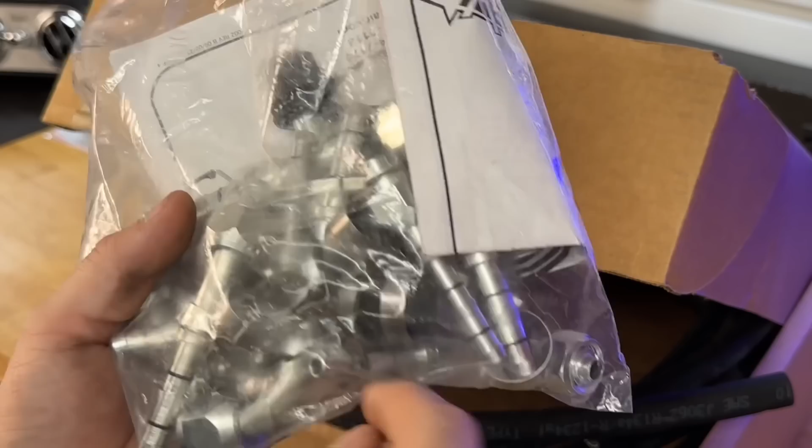The last thing that I purchased was this Easy Clip universal kit from Vintage Air. It has two 20-foot pieces of air conditioner line. With this Easy Clips kit, it comes with all these different connectors, straight fittings, 45s, 90s, but it has these Easy Clips on there that you can see right here, and you buy a specialty tool that will clamp those clips onto the line. It doesn't require you to get one of those big air conditioner clamps that are like $300 to clamp these lines on.

You can do it all from home, and it makes it very easy for me, especially because I want to go ahead and do everything that I can from here and not have to measure the line and take it out to a shop to have them cut it and crimp it. I like to be able to just do it all from home if possible. We'll see, this is the first time I've used this kit, but it was about $400 for the line, the clamps, everything.

Here are the Easy Clip pliers. When I bought this kit, I didn't realize you had to have a specific plier to use them, but it has a design that helps really clip these in tight. These are about 80 bucks for these pliers, so get ready to spend it up, but this is something I plan, if this works out, to use for all my AC, because I'll be installing AC on Lucky next, and I want to use the clip kit the same way. Good to have.

All right, first I'm going to take everything out of this box, unbox it, and lay it on the table over here, get out the instructions, and start to assemble everything just to get an idea of how it's going to install. Those instructions will tell me how to hook up everything on the front of the truck. I'll have to unbolt the radiator, and I might have to unbolt the fan, just to get everything out of the way for the condenser to get in there. But we'll see, we'll follow the directions.

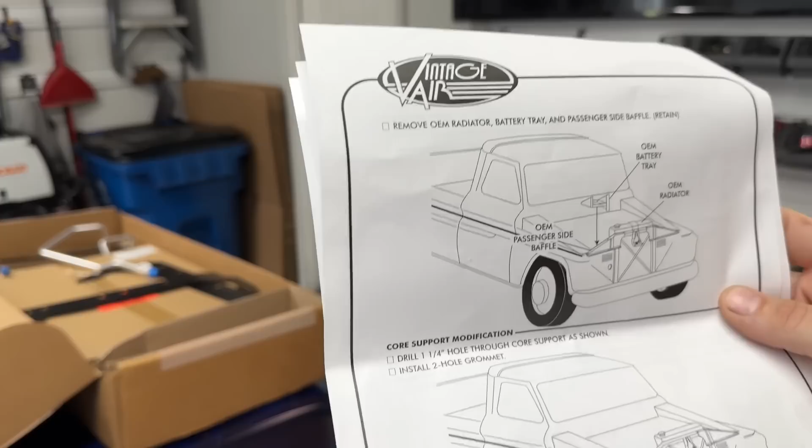All right, it says to take out the OEM battery tray. Well, I ain't got that anymore, so that's gone. And the OEM radiator, we're going to take that out and drill the hole.

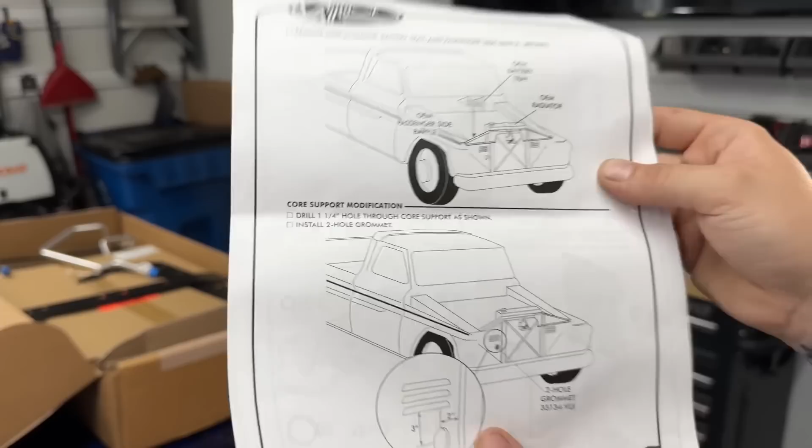You're going to measure across 2 inches and then down 3 inches from these vents, drill out a 1.25 inch hole, and then put the grommet there, and that's where the lines are going to run through the radiator support.

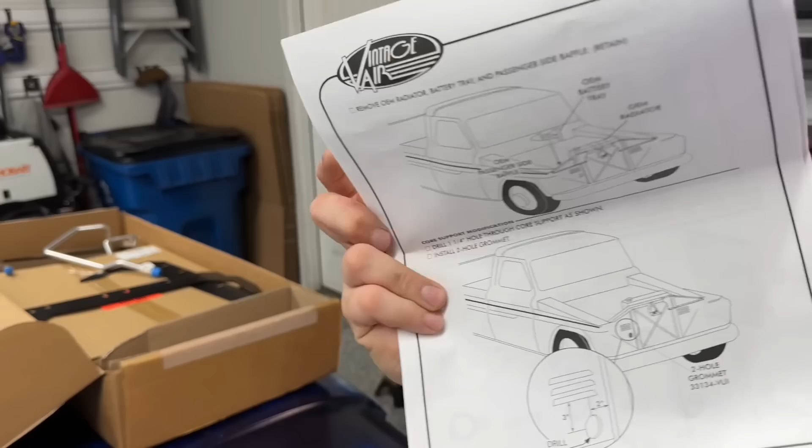Before we drill the hole and stuff, we're going to go ahead and assemble this part. So we're going to take out those 2 brackets and mount those on there just the way the instructions called for. I'm not going to go through every single step. If you buy the kit, you're going to have the instructions, but you're going to use the bolts and washers and all the things they use to bolt that all together. Follow the instructions here.

And then we will go ahead and mount up the dryer, just pay attention to the flow of the dryer, and you'll mount that there with the hardware, and then we will put the lines in there.

We're going to take everything out except the hardware. I'm going to go in here and get these little O-rings. I'm going to make sure we don't lose the O-rings or damage those in any way. We'll need those for sure. Go ahead and put those in the bag.

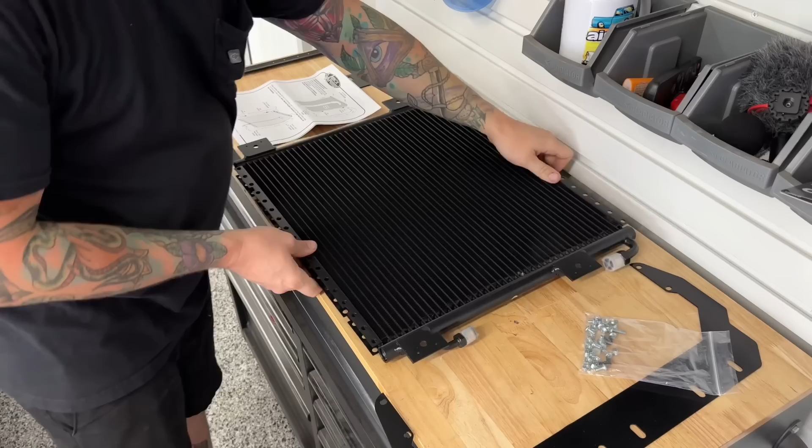On the picture, you can kind of see these brackets that are on the back side with these on the right side here. So it's actually going to mount up to the radiator the opposite, but we're installing these brackets this way so that will push this part further in behind the radiator.

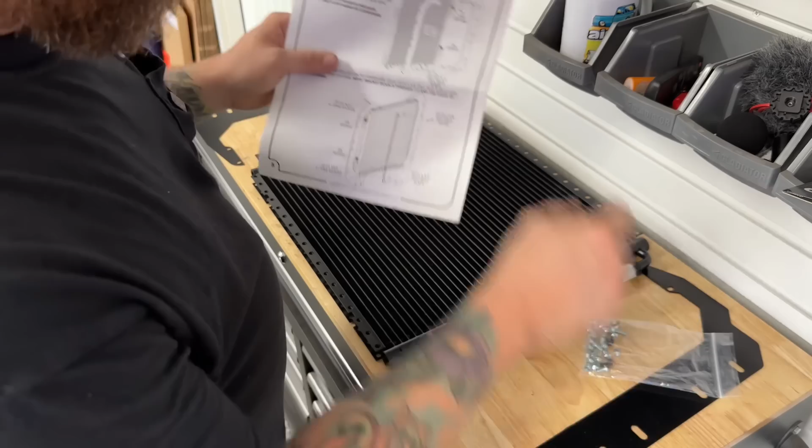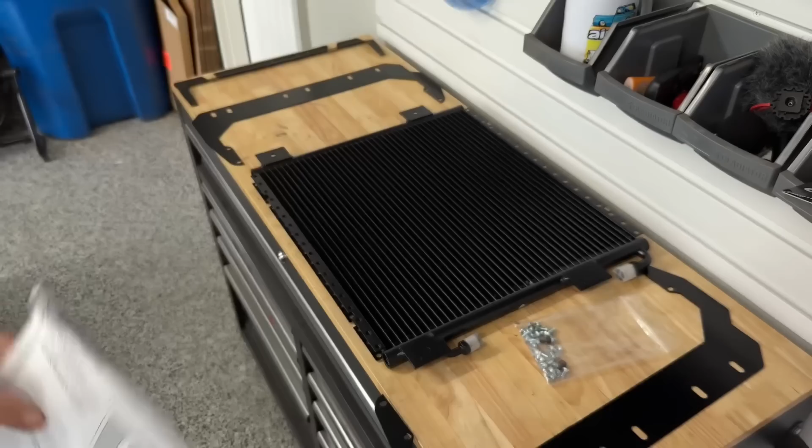There's the brackets on the side. Here's the brackets. Something I paid attention to whenever I was looking at it, I saw that the two holes that were closer together were on the bottom. As you see right there, those are on the bottom on both sides. So I know I've got that oriented correctly.

Be careful with that. I have seen on some installation videos people get that backwards. So what I want to do is just go ahead and get everything finger tight, and I'm going to come back with a ratchet and a screwdriver and tighten everything up.

So these basically just kind of mount together here, and on the instructions it shows that they're going in... ooh, that's hard to tell. It looks like they skip a hole and then go into the second and third hole. Yep, so skip your first hole and they go into the second and third hole here.

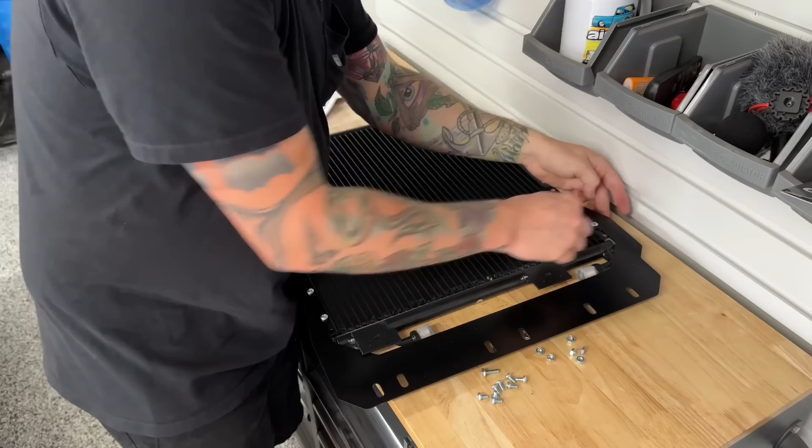I'm excited to get air conditioning on this thing because the Battle of Bama wasn't bad. It was actually very cool in the mornings when Brian and I drove down there. But golly, this past 2 weeks it has been scorching hot, and I'm really not looking forward to driving to Atlanta with it being so hot.

I saw the videos of Robbie from United by Trucks sweating in his truck, so I know it's hot down there. About 3 hours away from Atlanta, pretty much interstate the whole way, go through Chattanooga and then head down there, so not too bad of a trip.

It will be 2 long trips in a row for Francis though, so it'll be another test. Francis did great on the way to Talladega. I was really surprised. That was the first time I'd really drove it that far, and I was just nervous the whole way.

You know, when you get into a newer build, I only had a couple hundred miles on that truck, just driving it around the house on back roads to church, just 20-30 minute road trips. There was one day I drove it around about 3 hours to test it on the back roads, but nothing like a 3 or 4 hour straight trip somewhere. So I was really happy with how good it did on that trip.

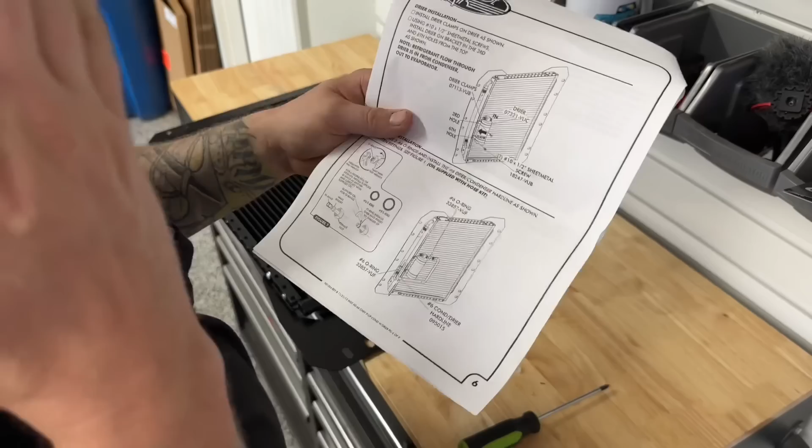But we've got those brackets installed the way that we needed them. Install the dryer clamps on the dryer using the sheet metal screws - that is these right here. We're going to get the 2 little clamps out to clamp that, and after that we will start installing the little O-rings and all that stuff.

Let's get the clamps, I'm going to go on like this right here, top and the bottom. Just like that right there.

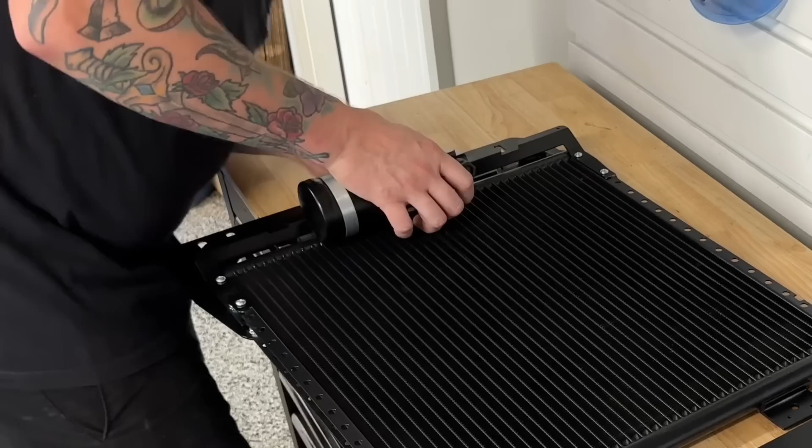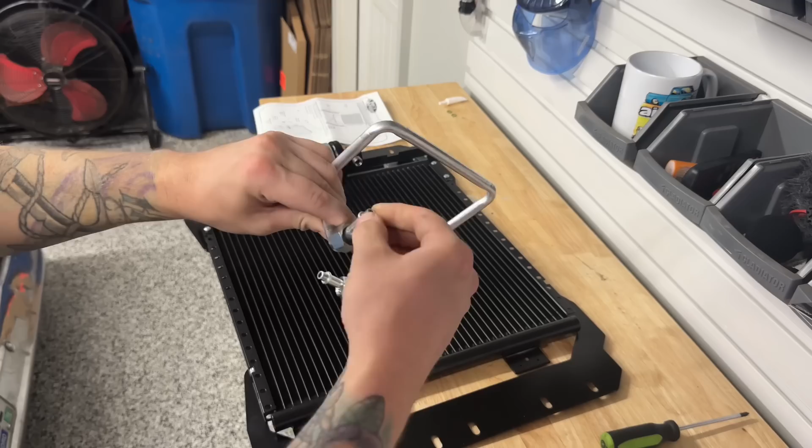All right, now it's time to put this little piece on right here. We've got to put 2 number 6 O-rings, which are the smaller O-rings. We've got to put a little bit of lubrication on there and then tighten them down. I'm going to go ahead and get them finger tight, and then I'll get the tools that I need.

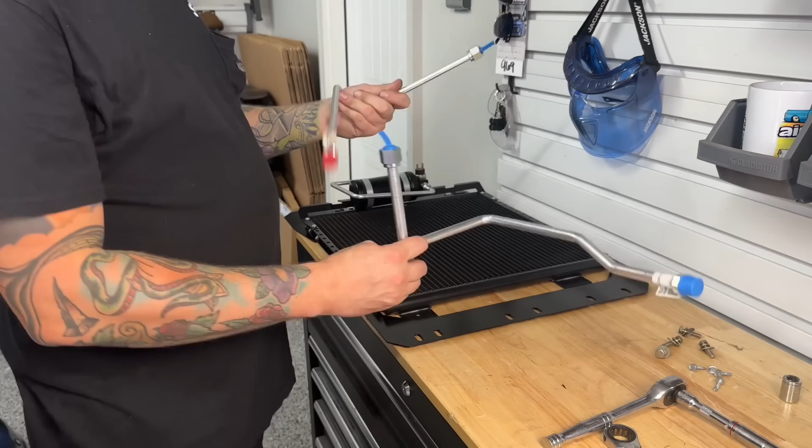Got that on there, all right, we've got this ready. I went ahead and unbolted the radiator and the fan and all that stuff. But what I realized is this front piece usually comes with the Sure Fit kit, and it comes with these pre-bent pieces that usually mount. You drill a hole in the radiator support there, these kind of stick through, and then the lines connect to these along your factory inner fender.

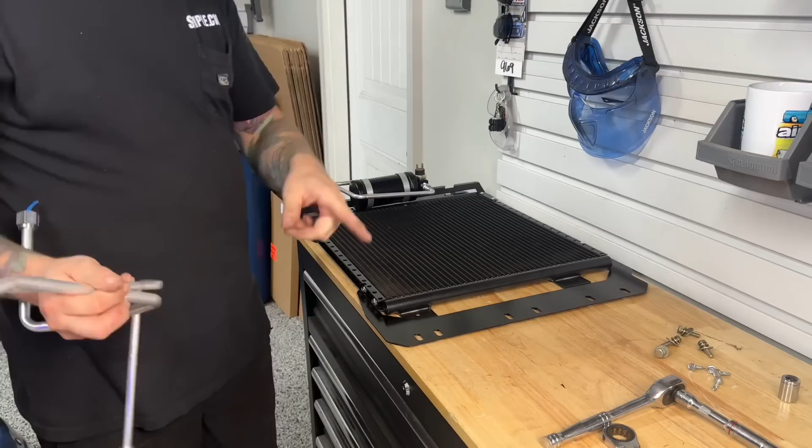Well, these would work under the GMSS inner fender, but you've got this big piece kind of sticking out, and it isn't going to give me the clean look that I'm going for on this truck. So I'm going to use that Easy Clip universal kit, and I already put some of the fittings on here to see what way I could run the lines. But I'm just going to run the lines and drill a hole closer to the frame down here, and then 45 off of these through the hole with a grommet on it and along the frame rail.

So basically, I'm not going to use these. I'm going to use my universal Easy Clip kit to mount those onto these 2 fittings and run the line where I need it to run without using these. I'll walk you through that. I've got to get this piece bolted into place and then fool around with the fittings and see what's the best way that I can run these lines up to the firewall.

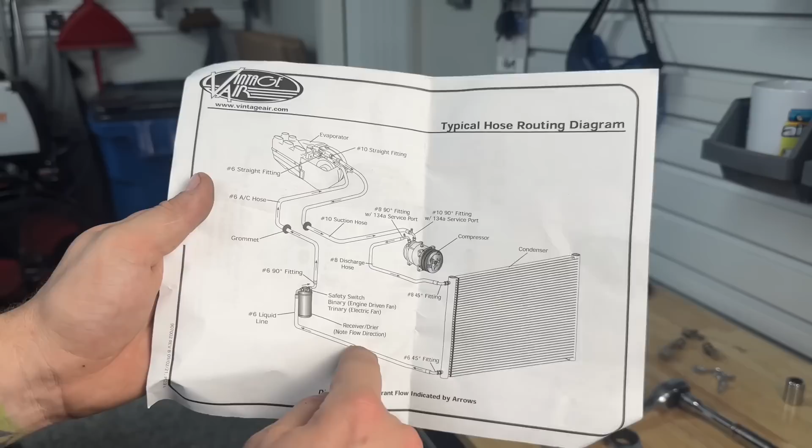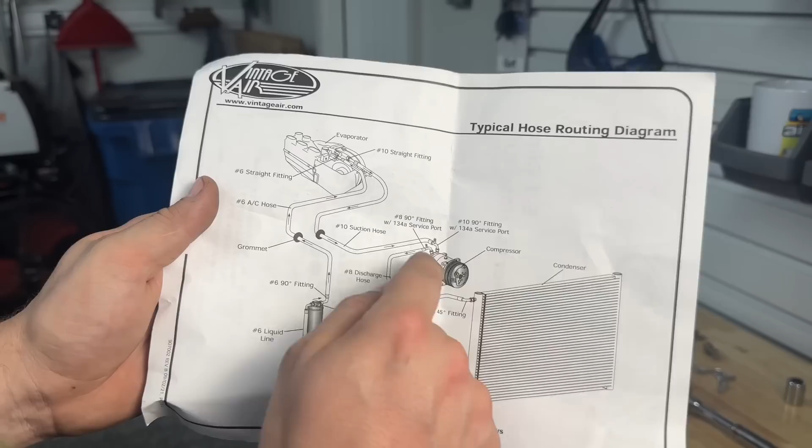On the Vintage Air kit, it gives you a typical hose routing diagram. We already have the condenser and dryer mounted, and this line is a hard line I just installed. So what we need to do is use the universal kit to find a fitting that fits up here and leads all the way to the compressor, then use a fitting here to run to the heritage unit, and from here use a fitting and run it all the way to the heritage unit.

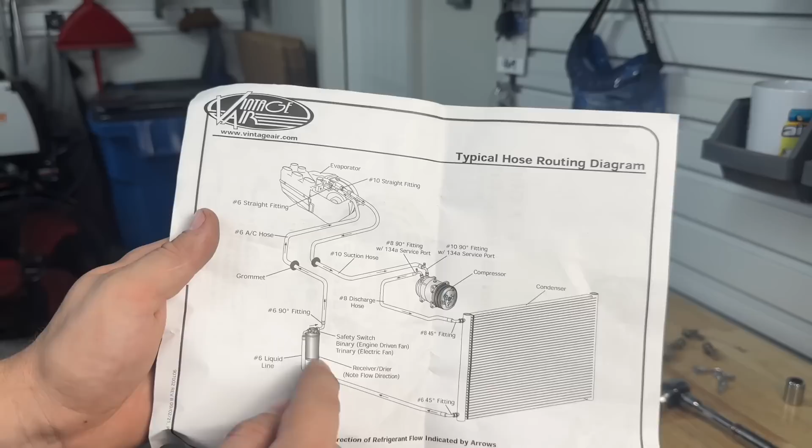Instead of drilling a hole in the firewall and running hard lines through it, we're just going to attach a couple fittings to the condenser and run our hose through the radiator support along the frame into the compressor, and then all the way up to the firewall into the heritage unit.

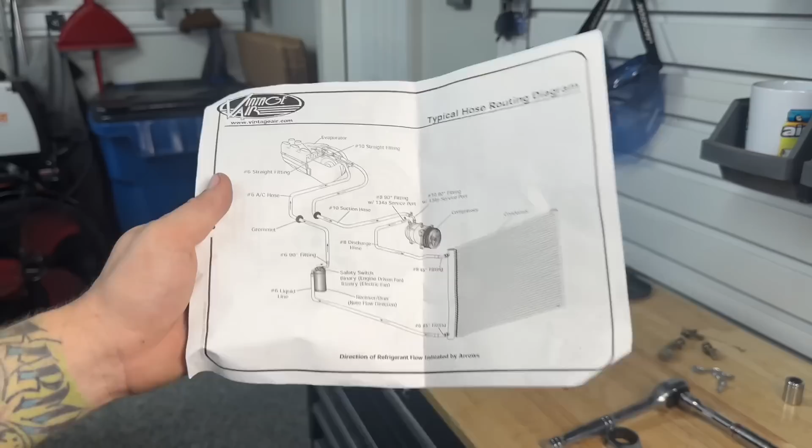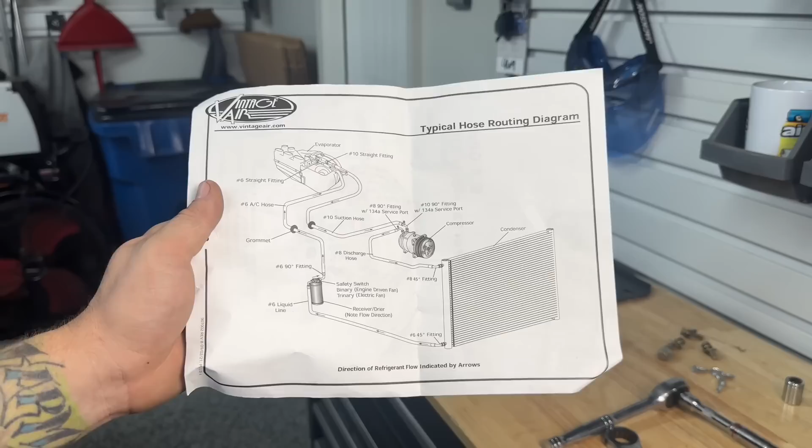I know that was a lot of words, but talking through this in my mind, I know I have enough fittings and everything. I might not have enough fittings to do exactly how I wanted on the firewall with the bulkhead fitting, but I can just drill two holes and put grommets and run the lines through there up under the fender or something. We'll figure that out.

Let's go ahead and mount the condenser in there and see what we're working with. I mentioned earlier I unbolted the radiator, and I just needed enough clearance to angle it up like this to slide down the condenser here. I'm going to take off this top piece because that's where I'm going to access all the fittings, and I'll just hand tighten them on there, then figure out where I can run my lines and drill a hole further down under the tub here.

We're just going to slide it right in between here.

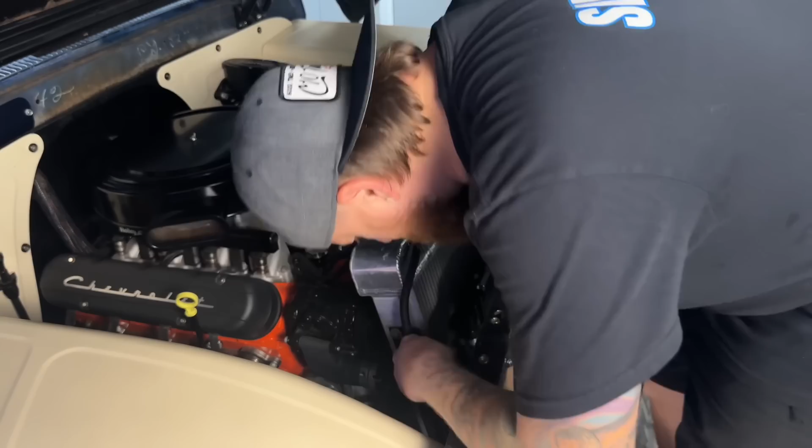You see the two fittings. Usually those metal pieces would loop around and then go through the firewall there. But what I'm going to do is put 45s on each one and run both of those lines in front of this piece, then drill a hole as far down here as I can, level with the frame, and run those lines along the frame and up to here, all the way to the firewall, and find a place to drill and insert those two hoses.

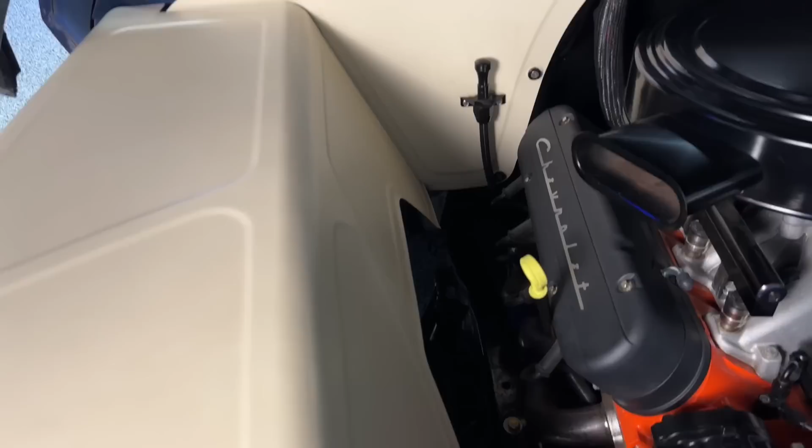Next up, we have the bracket that goes to your compressor.

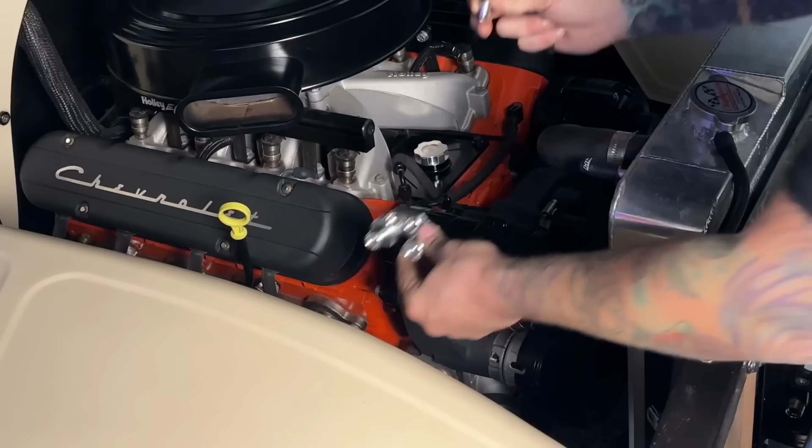If you're not running the Holley mid-mount setup, you might not have this bracket, but we're going to install the gaskets first and then put the bracket on and bolt it down. This bracket has the 90-degree fittings with the plugs to charge the system. So we'll install those, then run the lines up to it, cut those to size, clamp our lines in here, and run them inside the cab.

I'm just going to install these hand tight for right now. That way I can get the angle I need whenever I'm running the lines, and we'll tighten them down at the very last once I get all the lines in.

On the front section right here, I'm just going to test fit a couple of the different angles. I have a 45 and a 90 that I can use, but I want to screw those in there to see about the angle of the lines because they're kind of thick.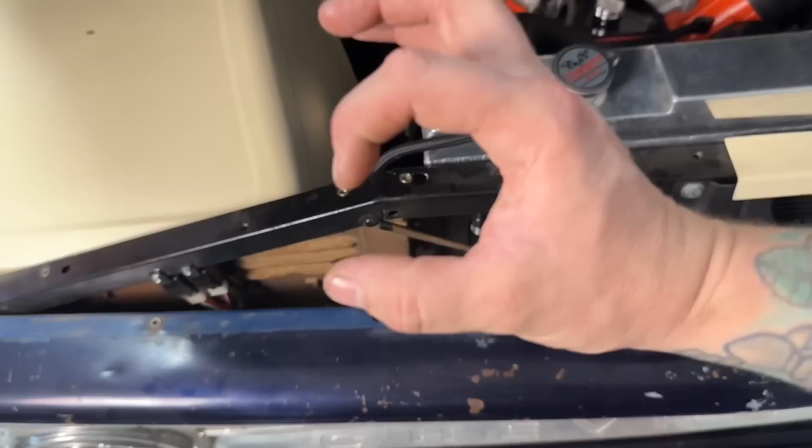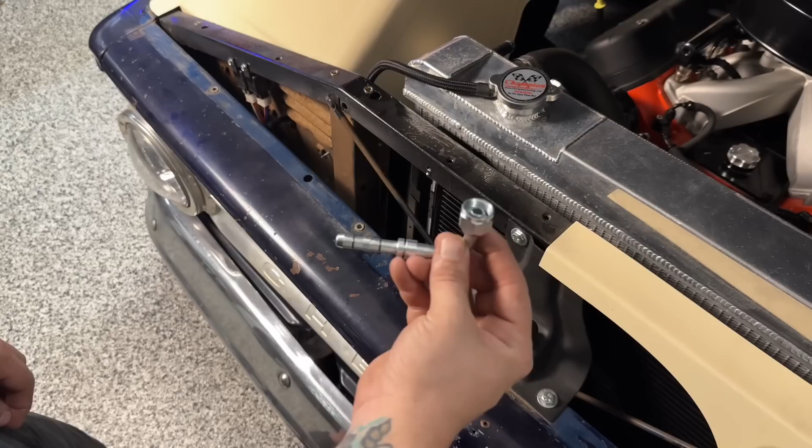I've got a grommet that I'm going to use after I install the lines, and I'll run the lines through the grommet and along the frame. It looks like this 90-degree fitting is going to work best down bottom, and then I'll run a 45 up top to be able to run the line down toward the bottom on the frame.

I'm just going to get the line into this fitting and use the easy clips to clip it in. That way I can start running the lines up to the cab and drill the holes through the cab and connect everything to the compressor. So whenever you get ready to install this, there are 3 different size lines.

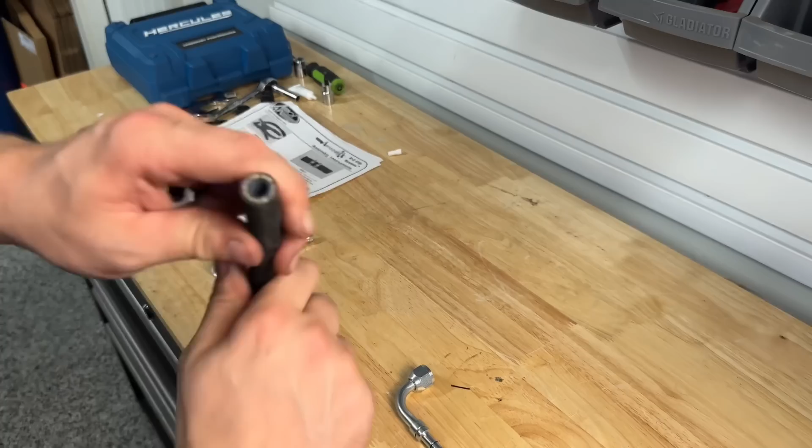They're pretty easily distinguishable. This is the smallest line, here's the medium size line, and then there's one bigger size that goes directly inside of the cab.

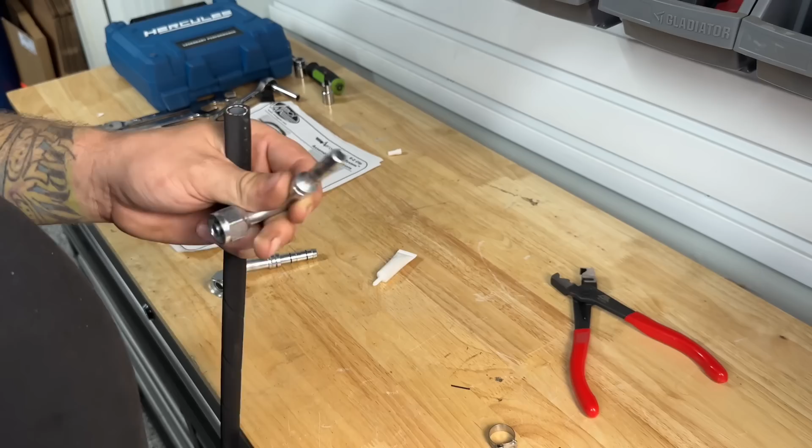But first, we're going to grab these pliers here, the easy clip pliers. We're going to grab the connections that slide onto the actual line to clip it on, and then there's something called a cage that slides on and connects. But first we want to lube up the connection a little bit so it slides into the line pretty easy.

We're going to take our clips and slide those on first because they won't fit over the end of the fitting. Slide this in, and then we'll put the collar or the cage—I've heard it called a couple different things. We're going to slide that on the end.

What I like about this is there's a specific groove that it slides into to make sure you get it in the right placement right here. You'll see me slide it on—slides on right there in the groove. And then the clips slide over those, and there's grooves in it that puts it at the exact placement you need. That puts it right on the little rubber grommets or the seals on the connection itself.

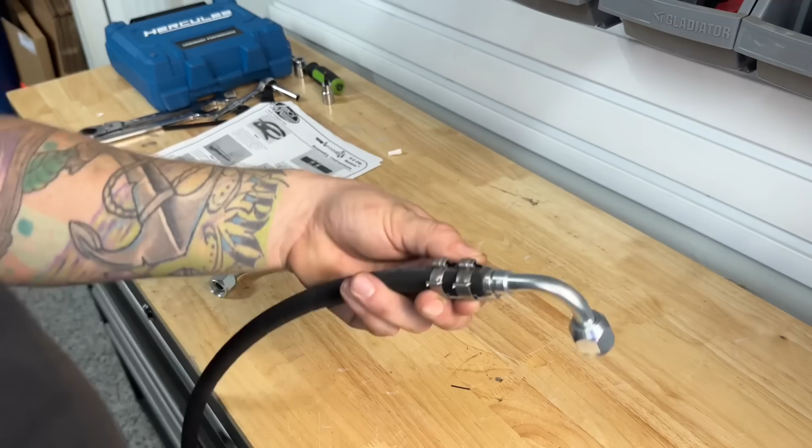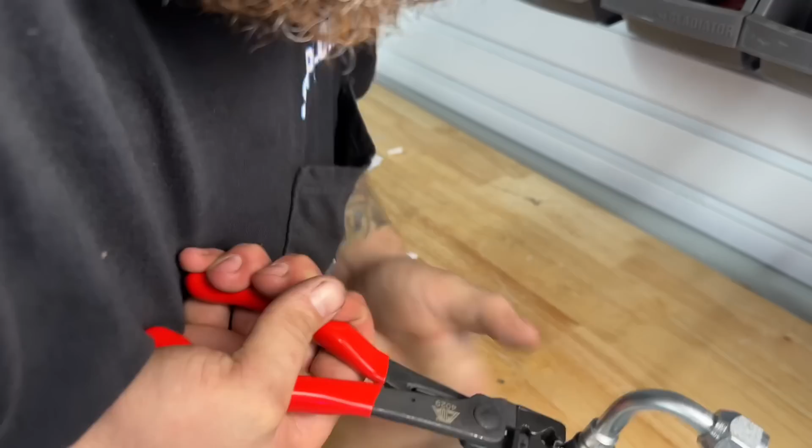So we'll grab that. You just take your pliers, and there's a specific way that the pliers work. You use the long end of the plier to go onto the edge to push it up into the clip. If you look at it, you can kind of see. But from there, you just squeeze it, clip it in, and you'll hear it snap, and you know you have it in the right place. Boom, there it is. Nice.

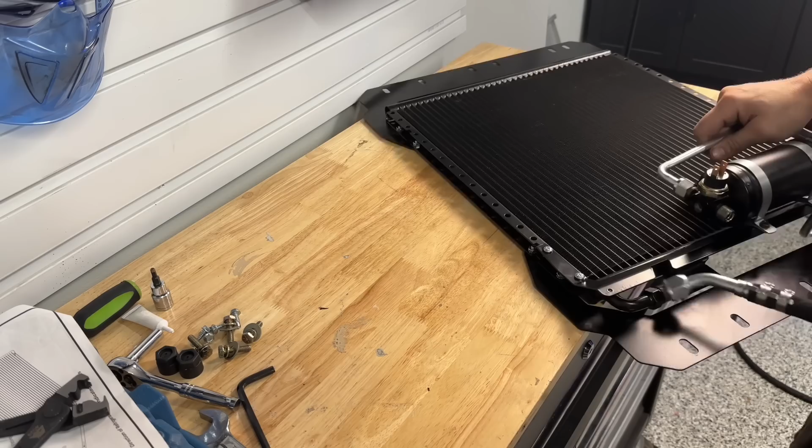Alright, you'll see that I went ahead and pulled out the condenser again and the dryer, and that is because it's really hard to clamp down these connections from inside of the truck. It is possible, but I just went ahead—I didn't have it bolted in all the way yet, so I just pulled it out.

And I'm going to bolt it in here. As you saw, I pointed at the dryer. I'm going to use the 45 up top, and that's the one I'm screwing in now. Then I'm going to use the 90 for the dryer right there on the bottom. I'm going to run those lines through the grommet that I'm going to drill here in just a second. Just tighten these down hand tight—you don't want to tighten them up too much.

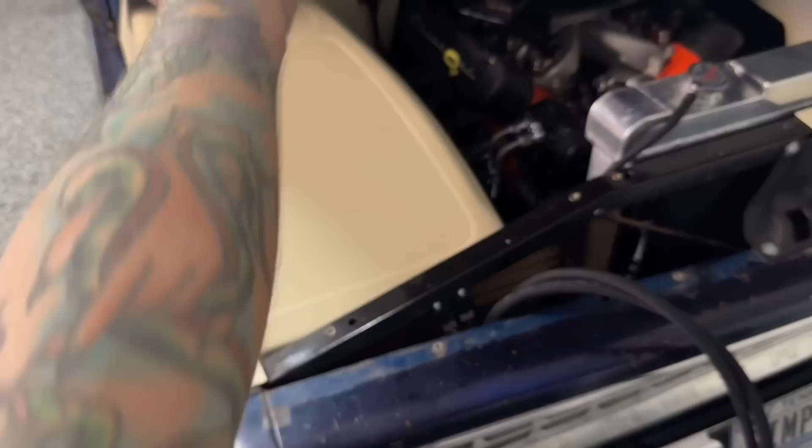Now that I have the condenser back in, the radiator's bolted in, and the lines are ready to go, I'm just going to go down and drill a hole very similar to where the instructions say. I have a 1.25 inch hole here with a grommet the right size. I'm going to go from inside the wheel well and drill it very close to the frame and then run the lines through there.

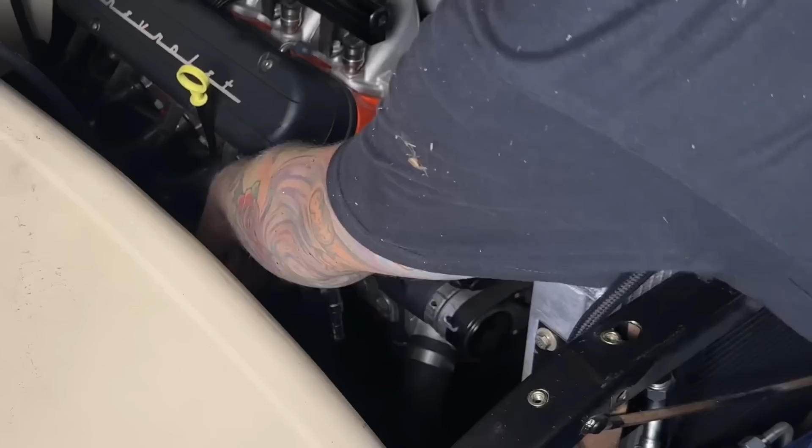Now this was tricky—this was the trickiest part—getting all the lines through the grommet, because they wanted to kink up, and I had to work them with my hand. You'll see in a minute I scratched up my hand pretty bad trying to get the lines through there. So just take your time with it.

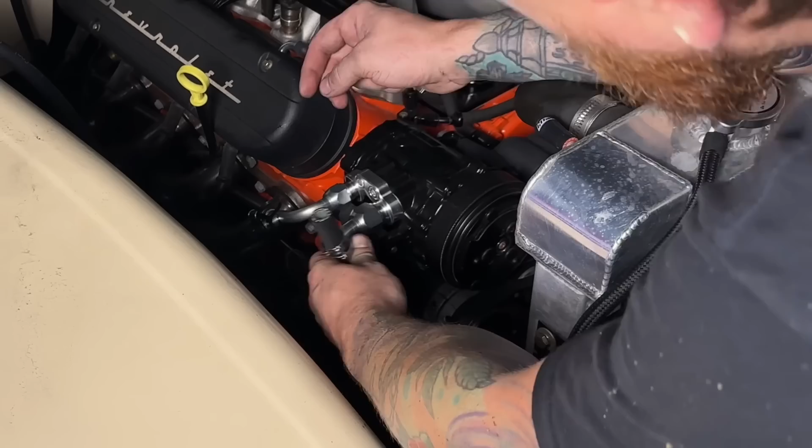Once you get the lines ran through, I'm going to run them up to the compressor and then cut them to size and go ahead and clip them in on here. That way I have all the front lines ran all the way from the condenser to the compressor, and now I'm focused on the lines running from the compressor all the way inside the cab, and then I'll cut those to length inside the cab once we have the Heritage unit done.

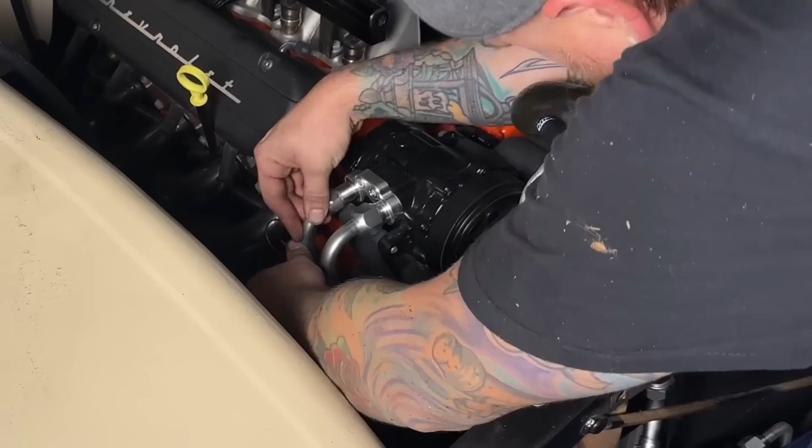Now it's time to install the biggest line on the compressor. This line's going to run inside the cab. So we're just going to go ahead and clamp it down to that fitting on the compressor, run it along the frame, and then drill the holes to run it inside of the cab to the Heritage unit.

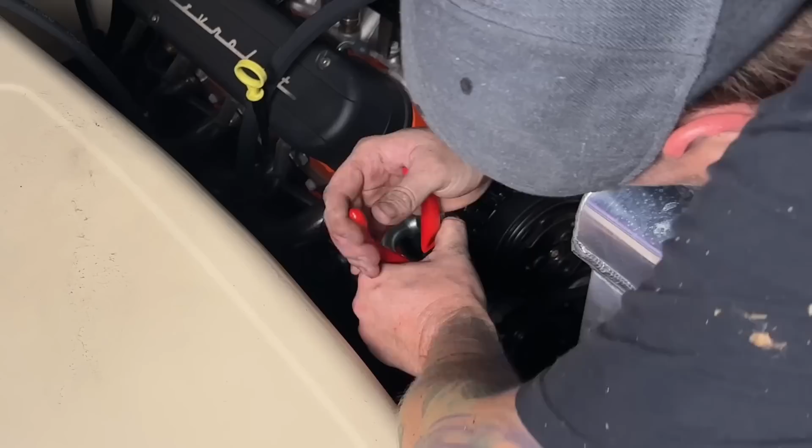Alright, I've got that line done. It's getting late now, but I wanted to show you, I ran the line along the frame, and now I'm just going to try to find a good spot in the firewall to drill the hole. I don't want to drill the hole in the standard place that's in the nice GMMS panel.

I want to run it below that panel and then up through the floorboard. So you'll see here I drilled the holes, and I'm just running it through there with the grommet. I'm pretty happy with how it turned out. The only thing left to drill is the drain hole later on, but it looks pretty clean.

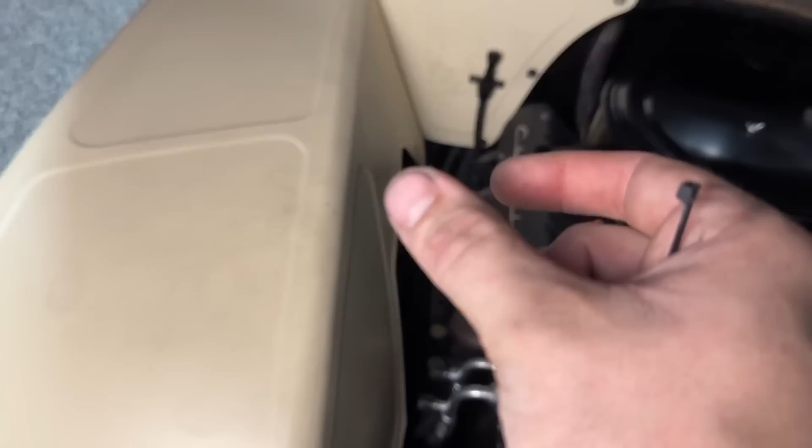It's hard to see here because it's getting dark, but I'll show you again a walk around once I get to Zach's. But I just zip tied those lines together, cleaned them up, and ran them along the frame. But I think it looks really good. It doesn't stick out like a sore thumb.

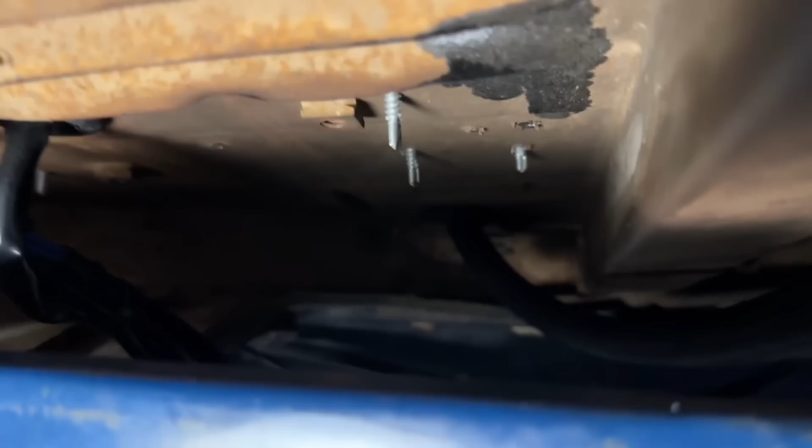I think it's an easy way to run the lines up to the front without trying to loop them all the way around the inner fender and all that. But everything connected well. It looks good. It was pretty easy to do this. Just drilling the holes and running the lines through the holes was the hardest thing.

We'll come back to this binary switch. We've got to run 2 wires to the binary switch, and what that does is protect your system whenever there's high pressure or low pressure. So one wire will run to the compressor and then to the binary, and then the other one will run all the way inside the cab.

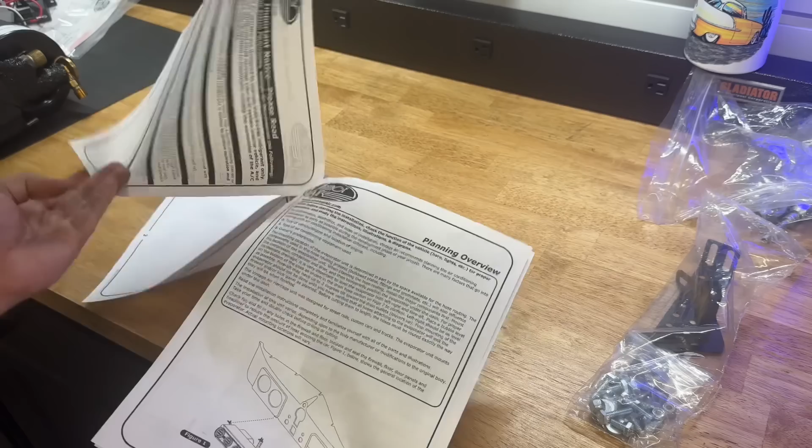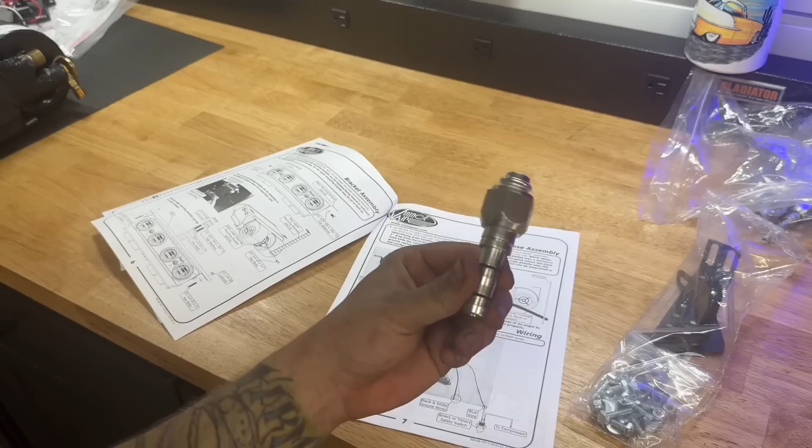All right, here is the Heritage Series instructions, and basically what we're going to do is mount it to the bottom of the dash. We've got 2 brackets that go on the side, and then 1 long bracket that goes on the back. After we get it mounted up, we'll run our lines to the back, cut those to length and clip those in, and then wire it up.

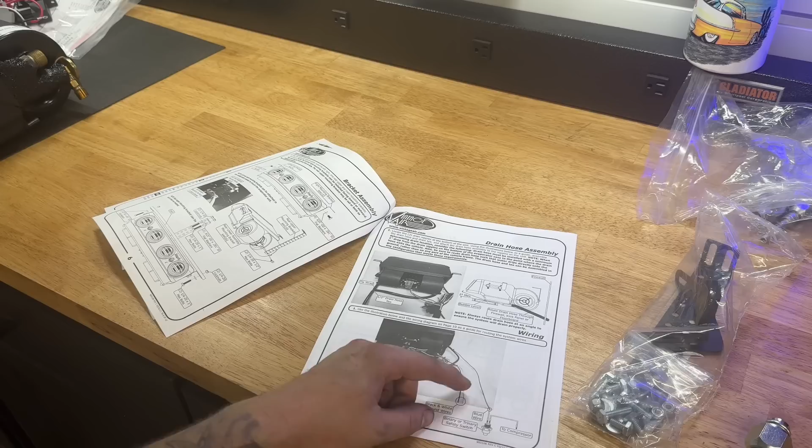There's going to be a battery for power, purple wire for ignition, a ground, and then the blue wire will go to your binary switch, and then the other side of the binary switch goes to the compressor, that little wire that I showed you just a minute ago.

All right, I'm going to get the brackets on this and go ahead and mock it up, drill the holes, and try to get this thing at least bolted in tonight. It's getting late already.

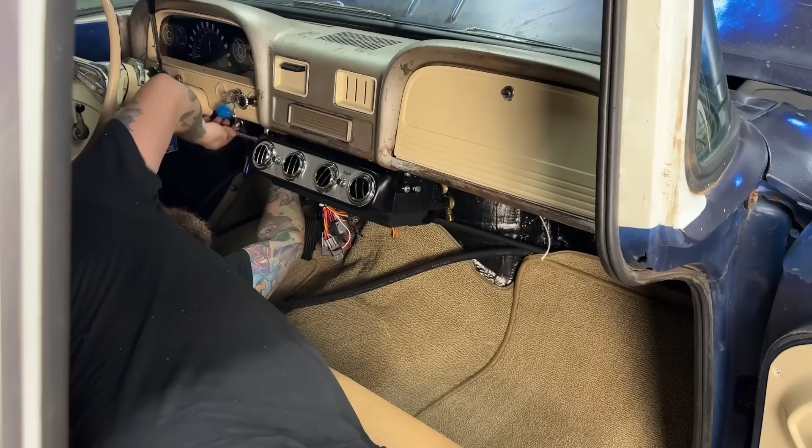Got that mounted in there. It's looking good. Pretty simple to do. Now I've got those lines that are running in. I just need to cut the line to the right length and bolt it all in.

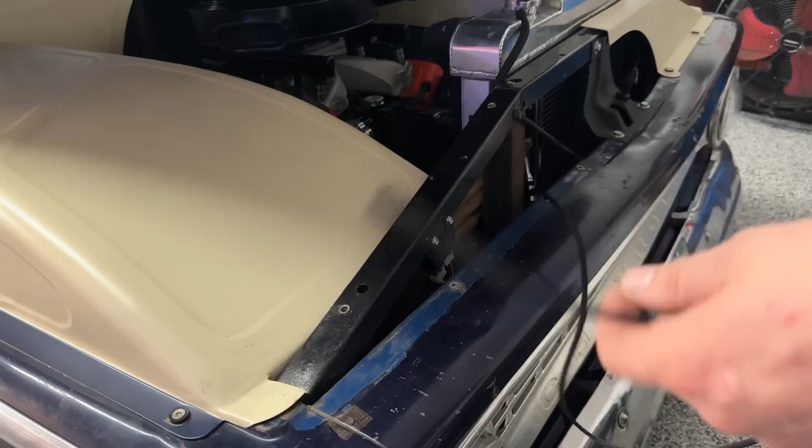Part of wiring it up is hooking up this binary switch. So this is going to run to the switch that's located right here on the dryer, and then it's going to run up to the compressor and plug in with this connection onto the compressor. And then the other side of the binary is going to run all the way inside the cab.

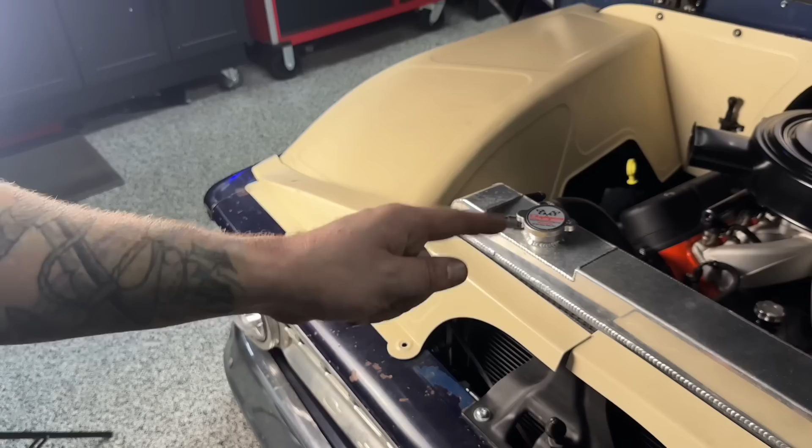All right, so I got the binary switch wired up, just 2 wires, one running from the compressor, one running inside the cab. Cleaned all that up, zip tied. Can't really see anything, it's pitch black under the engine bay. I tried to shine some light, but tomorrow when I get over Zach's, I'll do a walk around and show you everything in the daylight.

But I want to get this cover back on here, run the drain line. That's the only thing that's left on the inside, and that's it. It's not too bad, but as you can see, whoo-wee, I beat up my hands from reaching in between the radiator and all that stuff.

I need to go ahead and put my fan back on and all that as well. But wrapping it up.

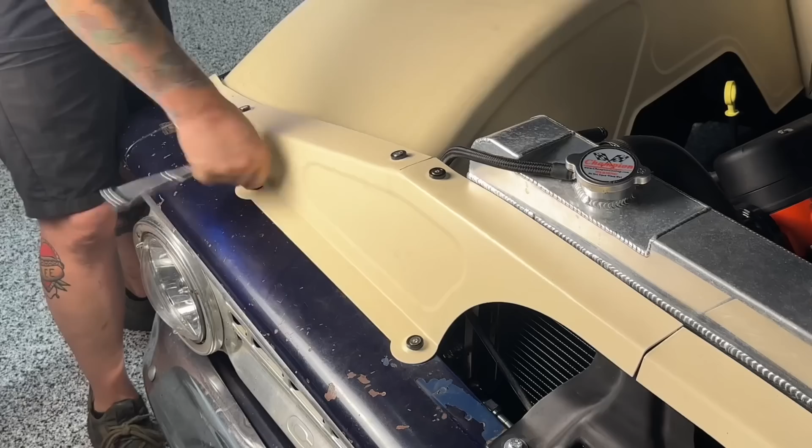So we've got this drain line to run. We have to connect 2 of these drain lines to a T, and then that T will go in the firewall somewhere to drain out the excess moisture.

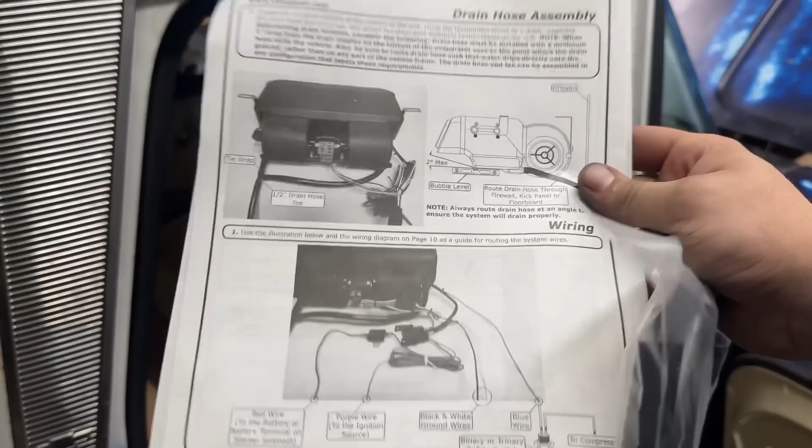Tight as I can here. It's kind of freestyling here.

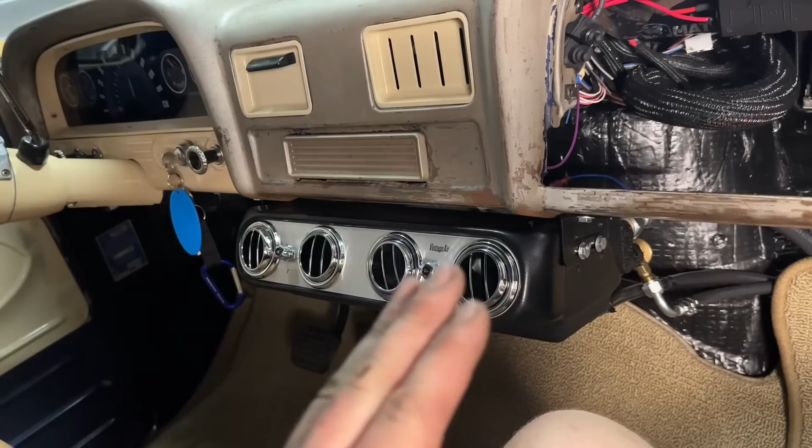I'm going to do the best that I can to show you the wiring on here. So mounted it up. There's a power, ground, ignition, and a wire that goes up to the binary switch. So you can see the blue wire going to the binary switch.

I've got it running through the hole here in the firewall. That runs all the way up. So I've got the ignition run to this power bank right here. That's all ignition.

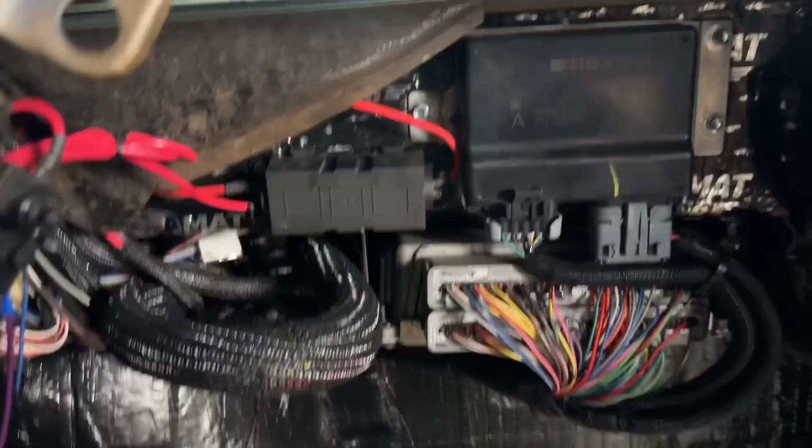The power is ran to this little fuse that comes from the battery, and then it goes to the painless harness as well. All this stuff is behind my glove box. It's kind of how I mounted up the LS. In case you've never seen this, this is the factory computer, and this is the factory part of the computer as well.

The painless LS harness, there's a fuse box right there, and then I loomed up everything, made it look really nice. It goes to the firewall right here that runs to the front. I know it's a lot of wires, but I organized it to the best of my ability. None of this stuff is flopping around or live.

It looks pretty good once the glove box and everything's on there. But yeah, I've got this. When I turn the key over, so we've got air and different levels. This switch is going to control the different levels that it blows out, the intensity of it, and then this is the thermostat on this side.

But I've got to get it charged up tomorrow, so I'm going to go over Zach's. Now I just need to get the glove box back on, and that's pretty much it.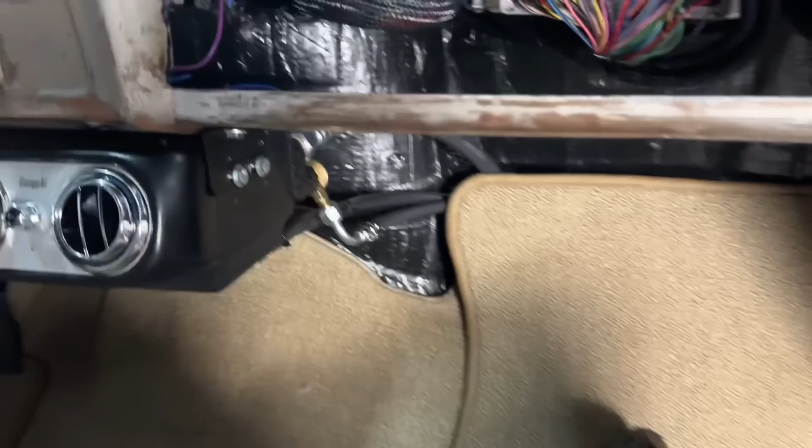You saw that I did the drain. It gets moved over and then teed, and then that drain just goes to the floor right there. I could have done it up here. A lot of people do it through the firewall right there, but my firewall is clean and I want to keep it that way. So I just ran everything a little bit behind the carpet right here, but it looks fine. I'm happy with it. I hope that it works tomorrow and it blows really, really cold. That way I can drive this thing to C10s in the city and be cool.

Alright, it's getting cold.

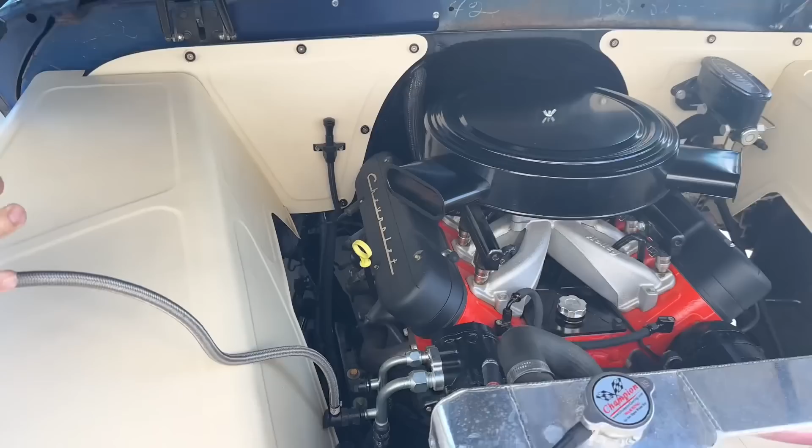Got it cranked up all the way. I mean, it feels cold right now. I think he's got a thermometer, we'll check it. But golly, already I was sweating on the drive here.

Oh yeah, that's feeling good.

Lines are ran through the floor right there.

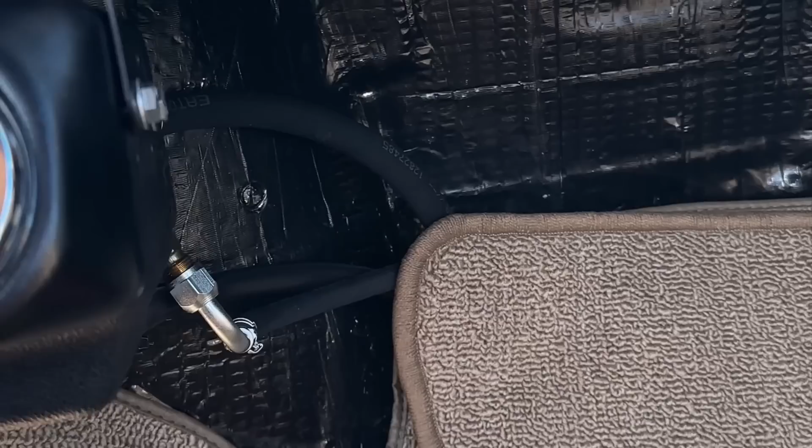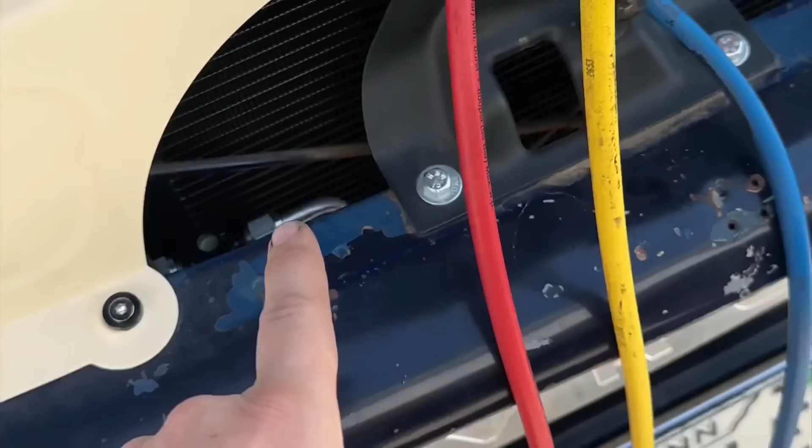Hey, what's up everybody? It's been a couple weeks since I've had the vintage air installed. I was able to go to C10s in the city. It worked great. I just got back from C10. I've got Lucky here. We're doing some more work to Lucky.

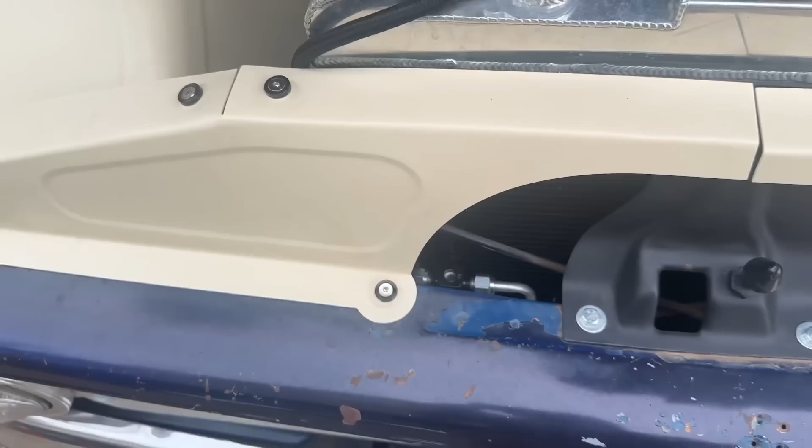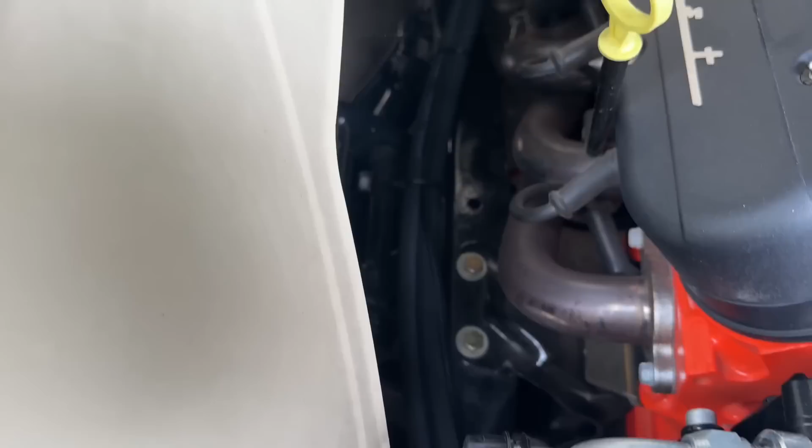But here's Francis. I wanted to show you a little bit one more time how this AC is ran in the daylight. So here is the dryer and the binary switch, how it's hooked up. I've got the lines that are going through the radiator support here along the frame. Here's how it's ran through the firewall, just along the frame rail, zip tied. You can see the binary switch wire is right here running up to the compressor and then through the radiator support up here to the dryer. I mean, you can barely even see it. If you're not looking for it, you don't even really see it at all.

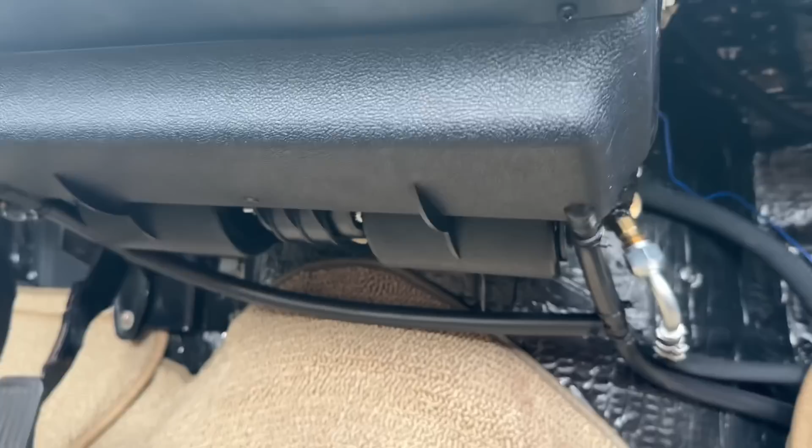Here's how it's ran on the inside in the daylight. There's more of the drain. The line ran, it's teed, and then that's ran through the floor right there through grommets. But pretty easy to do. Takes a little bit of time, but I'm super happy with it. So thankful to have air now.